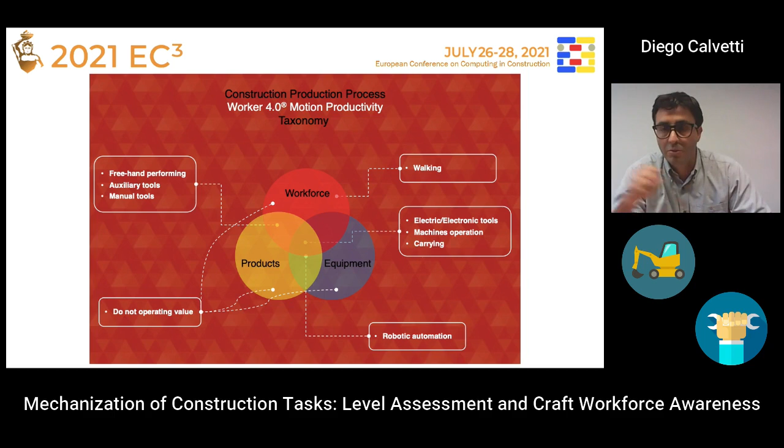The on-site construction tasks are driven by the workforce, the equipment, the machines, the tools and products, and all that is most of the time handled by the craft workforce. We established 9 processes for modeling the construction tasks. It's not as detailed as, for example, the Therblig motion study of grasping, moving, or releasing. Nor is it as wide as the classical approaches to measure industrial process, such as operating, inspection, transportation, and delay. However, these 9 processes can interconnect with that classical approach.

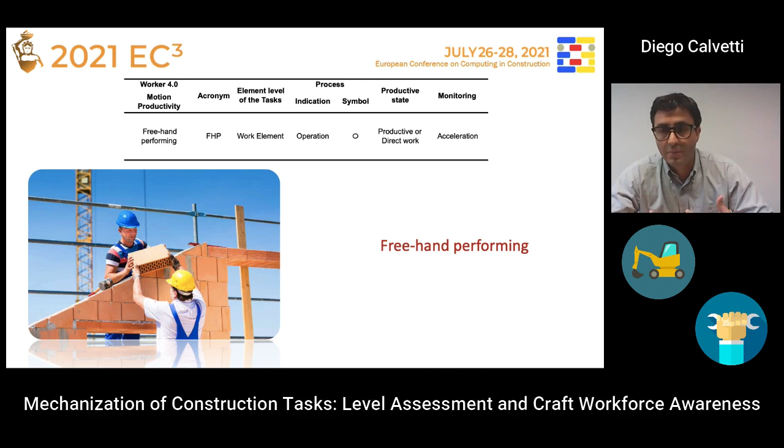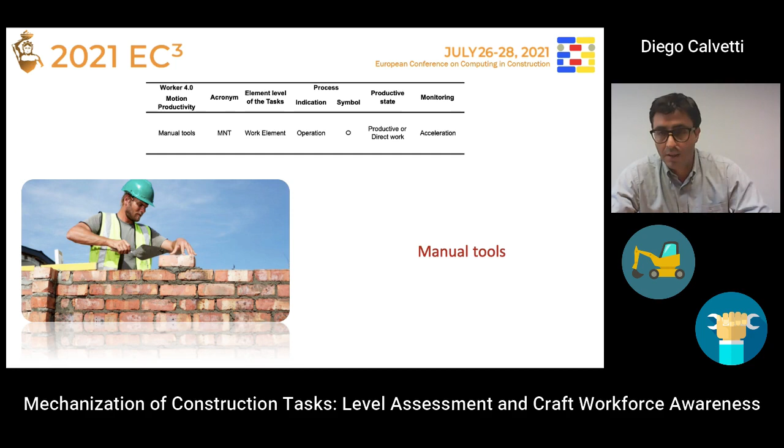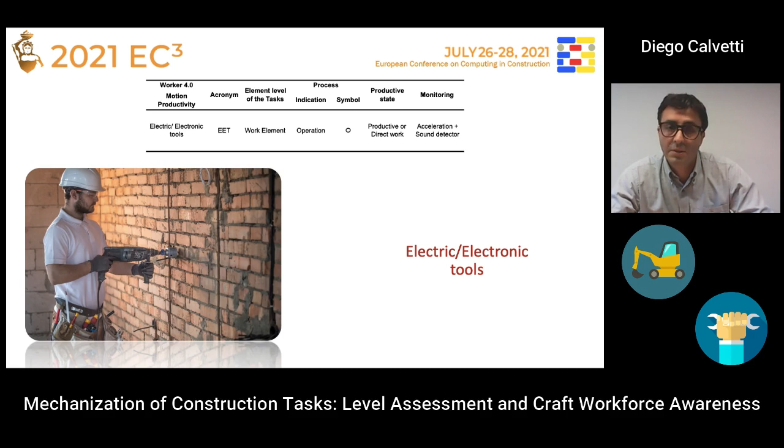Next I will quickly present the 9 processes. First is free-hand performance, when the worker is performing a task with one or both hands, handling materials or products. Many times they are assessing their own work using auxiliary tools, for example a measuring tape. It's often observed the use of manual tools, for example a trowel. And nowadays you can observe more and more the use of electric and electronic tools on site. This constitutes, in our concept, a mechanical process.

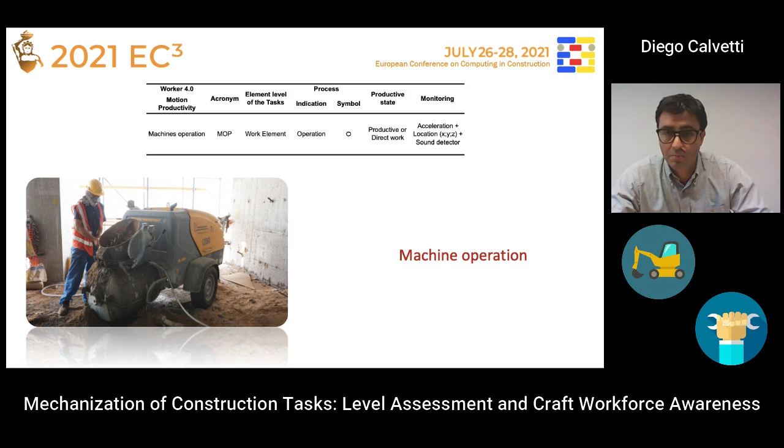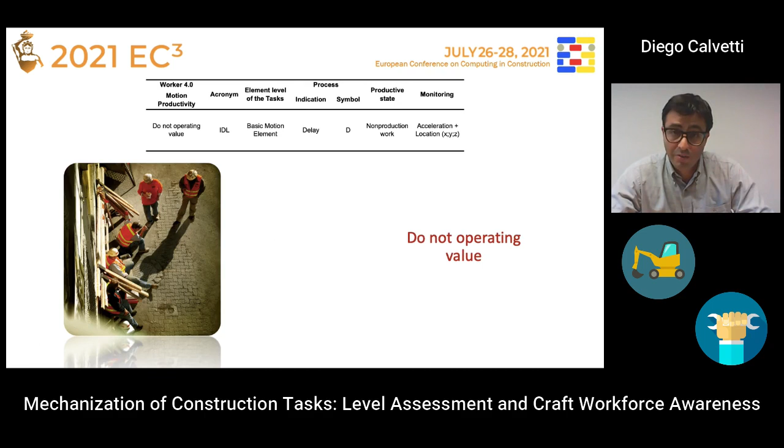It is also a mechanical process when workers are operating machines and equipment. Not common yet is the automated process, which is of course a mechanical process. As human beings, the workers will have some idleness time, and that is natural. As natural is that the worker will be walking, traveling across the construction site, and many times carrying products or machines to the place where they will effectively perform the task.

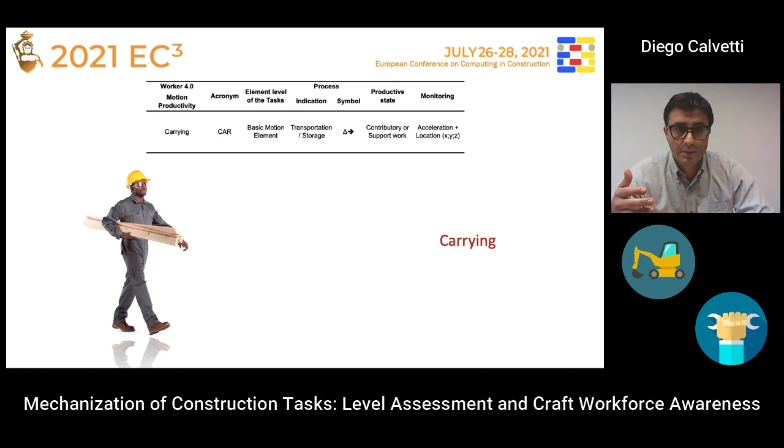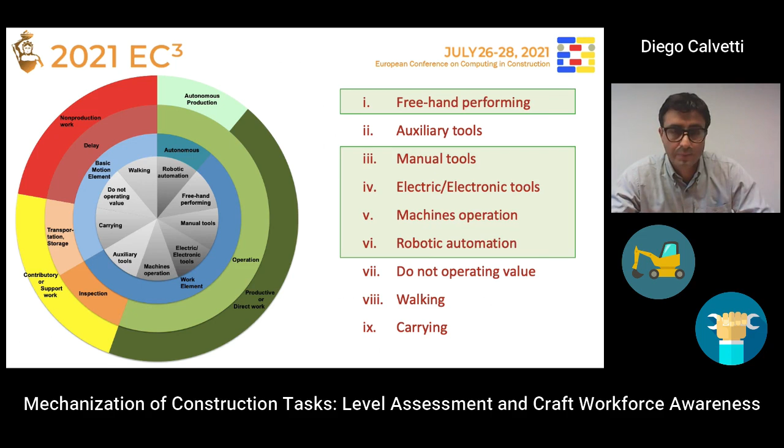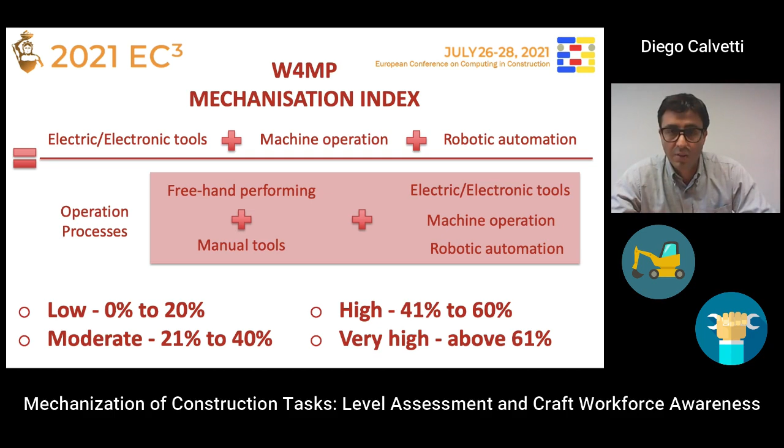Also, it is important to notice that the process should be modeled based on the crew performance, not only on 1 or 2 workers. After that, over the results, we suggested classifications of low, moderate, high, or very high.

In these pandemic times, it's quite impossible to go on site and conduct experiments. We confronted that situation and tried to move forward, because we had a small sample, so we conducted Monte Carlo methods to try to model that process and face that challenge. We think we can see that in detail and use this again in some experiments. We experienced this at 4 different sites.

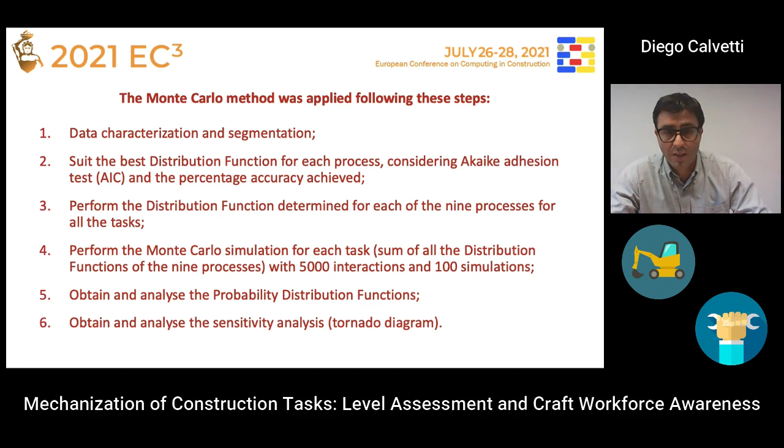The first one was a masonry activity in a residential building, and it achieved a low mechanization index. Only the brickwork was analyzed, without the coating. This activity is very manual, where the workers are handling the blocks and using manual tools to pour the mortar. The crew was composed of 3 masons and 1 assistant, and there is demand for supportive work such as supplying the mortar, supplying the blocks, cutting the blocks into smaller pieces, and transporting them to the front zone.

Approximately 64% of the time, workers are carrying out operative and productive activities. Most of the transport, as I mentioned, was regarding the supply of mortar and bricks to the front zone. The workers carry out inspection of their own work to guarantee the plumb and level of the elements. And as you can see in the right corner, in that sensitivity analysis tornado graphic, we can see highlighted the high impact in the model output, while machine operation does not affect that output.

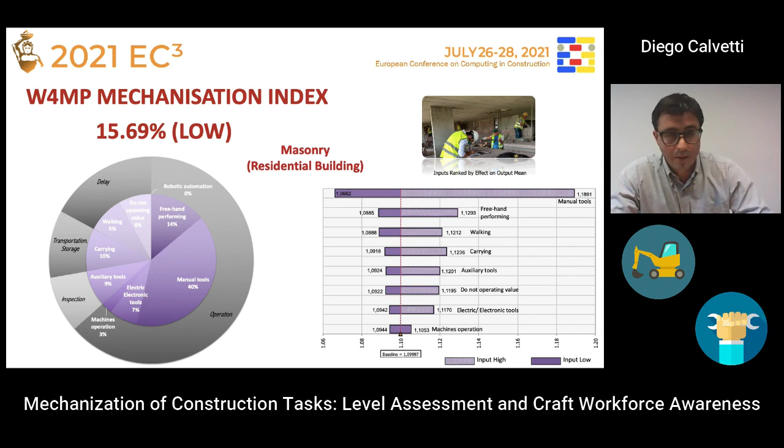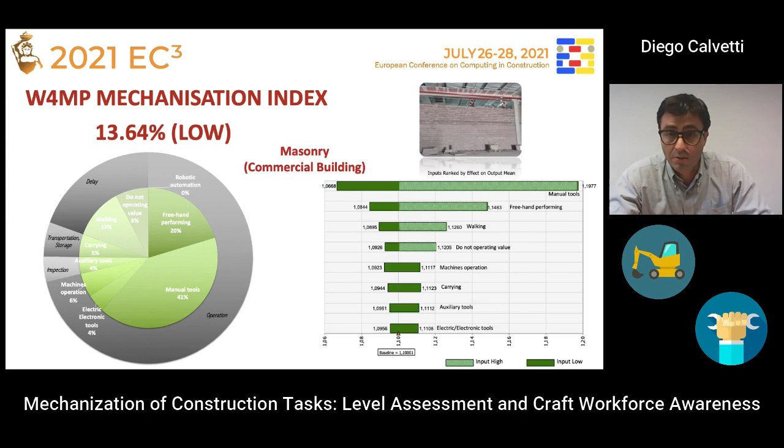Similar here was an activity of masonry in a commercial building, which also achieved a low mechanization level, 2% difference, and the crew was also composed of 3 masons and 1 assistant. Different here, a forklift supplies the mortar and the blocks on the scaffolding elevation where the work was carried out. Drill and grinder were the electronic tools we observed the workforce using, and different manual tools are used, such as a trowel, a float, a shovel. As well, some auxiliary tools are used to measure and position the panels.

The piping activity reached a high level of mechanization, 42%. This piping activity consisted of disruption of the existing pavement, mechanical excavation, placing the pipes and braces, and afterward compacting the soil. On average, 5 to 7 workers were observed at one point.

A low inspection rate was observed, as few measures are needed for this specific work execution. Since transport was mostly carried out by machines and their operators, workers working around were mostly transporting just the tools and accessories. There was a massive delay, related to the fact that most of the crew was waiting for the operation of the machines, the action of the machines, which increased that delay time a lot.

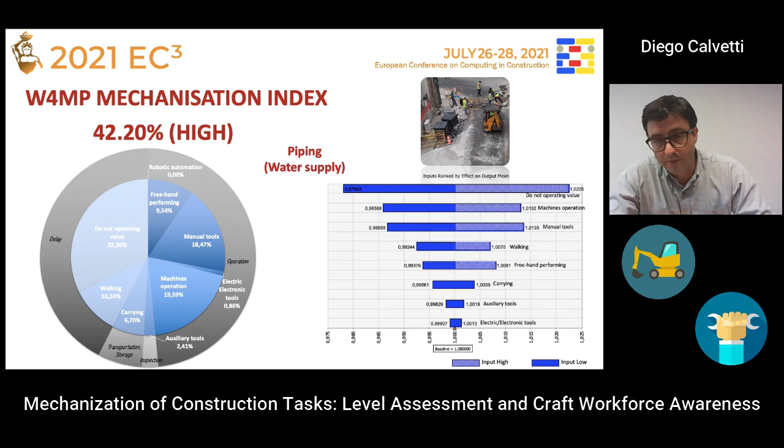Finally, the ETICS activity reached less than 2%, being considered low. A crew composed of 2 officers and 1 assistant performed the thermal insulation of the external walls.

The activities corresponding to cutting and fitting the mineral insulation boards, applying mortar to the entire surface and pressing on the plate and floating, inserting the plaster reinforced mesh and testing the finishing plaster. There is a demand for support services such as supplying the mortar and some pieces of the boards.

It can be seen that the lowest process performed was the electric and electronic tools, used to mix the mortar. It was possible to measure that most of the time the craft workers are handling a hand tool to cut the boards, or using a float to perform the action of laying the mortar.

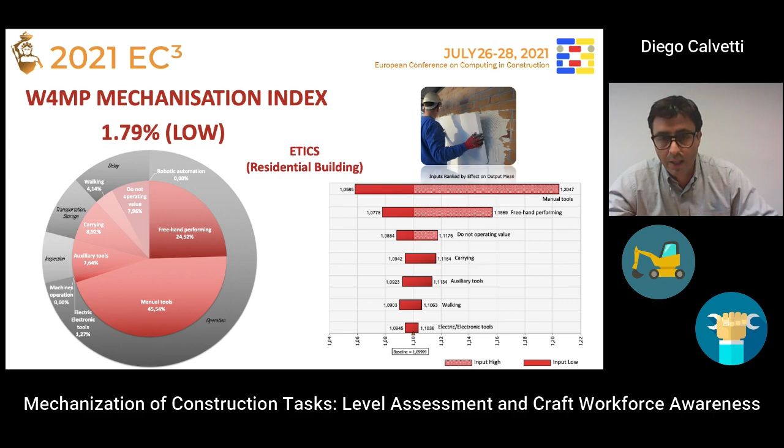As a result, it can be seen the similarity of masonry tasks, both residential and commercial ones, as well as the dissimilarity with the ETICS task, culminating in a big difference for the piping task. It was a very different process, the piping, from the others.

We can see the difference in the mechanization level. That quantitative mechanization level measured is found to well represent the process, as you can see the difference on site, and we can see the difference in the value of the numbers. It is observed that each task achieves a consistent mechanization level based on their particularities.

Significantly, it was measured that although the piping task achieved a high mechanization level, its operative and productive time was lowest among the others. From this, we can highlight that increasing the task's mechanization level might not be enough to boost productivity.

That should be composed with the process, and we can have, as I told you before, that confront with people, weighting the work of the machine, and that is why the modeling of the crew performance is important.

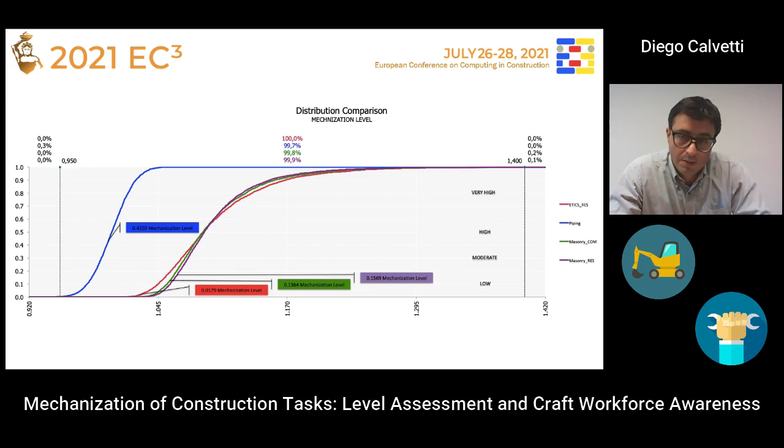This distortion was mainly related to the interrelationship of the activity, and the lack of synchronizing between the workers, the workers and machines, and that can be assessed.

Regarding the craft workers' first reactions, as I told you, we addressed some craft workers on site and talked about electronic performance monitoring, and we talked about the mechanization of the work, and the possible benefits and threats of this type of technology. It was very clear there was a lack of awareness about that.

Some workers said that monitoring health could be a benefit, and we also tried to understand if there was comfort or discomfort wearing this type of wristwatch. Some workers said they have no problem with it, while another said it could be a little discomforting to wear during the day.

It was also very clear, the discomfort regarding filming their actions. They all disliked the action of being filmed, and that is important for the next experimentation on site. I'd like to quote something because it was very impressive to me.

A worker said to me that mechanization is bad because it takes away our work. If there are more machines, we have less work, and that is bad.

We should target making this clear: the concept and purpose of bringing more tools or machines on site is to make the work require less effort, and that will bring more health, more safety, and more productivity, which will be good for both the employer and the employees. We should target that awareness on site.

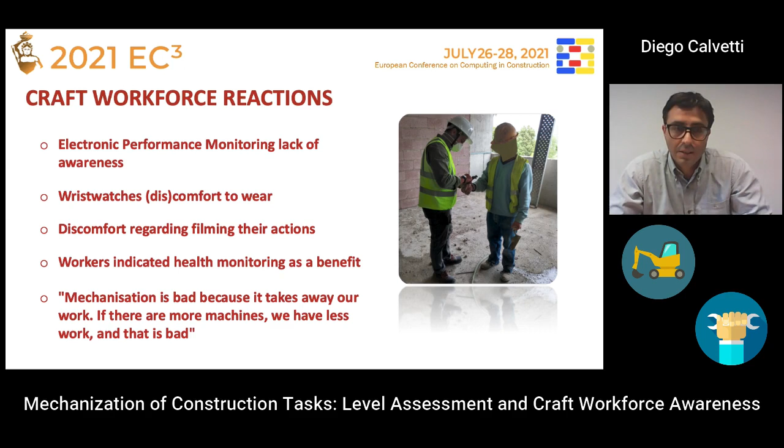Concluding, from the experiment, it becomes clear that the use of more equipment might not lead to boosted productivity. We should model the process based on the crew, to quantify the mechanization level based on the crew, and try to understand the relationship between the workers and the machines, as that will be the way to increase performance.

Of course, we should measure it and have this quantitative way to measure the levels of mechanization of the activities, but it should also be important to observe and analyze the whole process, the whole crew. Most craft workers have no awareness about innovation, and we should deliver that information, bringing education to the site to talk about innovation.

And of course, more data is needed, because this is just the starting point. We need to go on site and collect more data with different tasks to achieve a benchmark and improve our models.